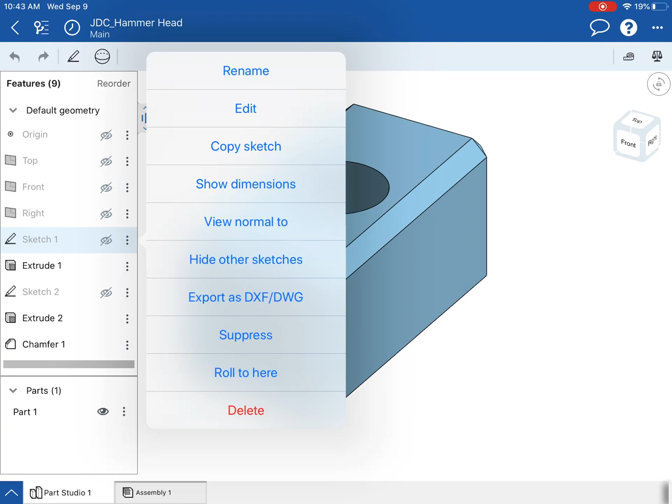And very quickly, this is going to be an easy fix, I'm just going to make it a little bit bigger. So the first thing I want to look at is probably sketch 1. Under sketch 1, you can see on the left-hand side there's going to be 3 dots next to where it says sketch 1. I'm going to tap those 3 dots, and then it's going to give me the option to edit. So I'm going to go to edit.

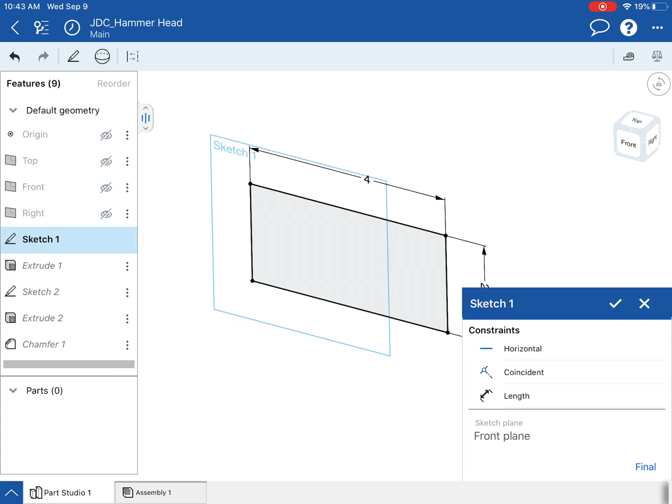And there I can see that I have a 2x2 square. That's what we started with at the beginning of our design. So what I'm going to do is tap on where it says 2. I'm going to double tap, and change that to 4. Hit the check mark. And I'm going to do the exact same thing with the other dimension - tap on where it says 2, double tap, change that to 4, check mark. Once I've made that change, I'm going to hit the check mark where it says sketch 1 in blue.

And now you can see that it's kind of changed, and it looks a little off, right? Or a lot off. That's okay. What we're going to do is go into our extrusion 1, and we're going to extrude a bit more than we did before.

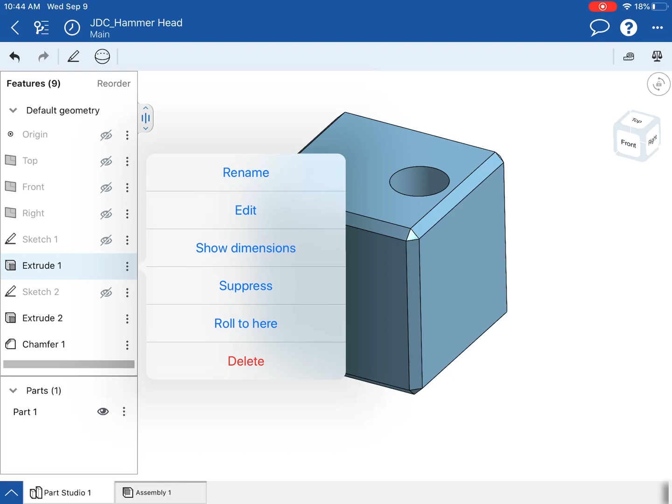So where you can see extrude 1 on the left-hand side, we're going to tap the 3 dots, and then go to edit. We just edited sketch 1, and now we're going to edit the extrusion to sketch 1. So edit, and you can see that under depth for that extrusion, we did 4. So we doubled up - we went from 2x2 to 4x4. So I think it makes sense for us to extrude twice as much.

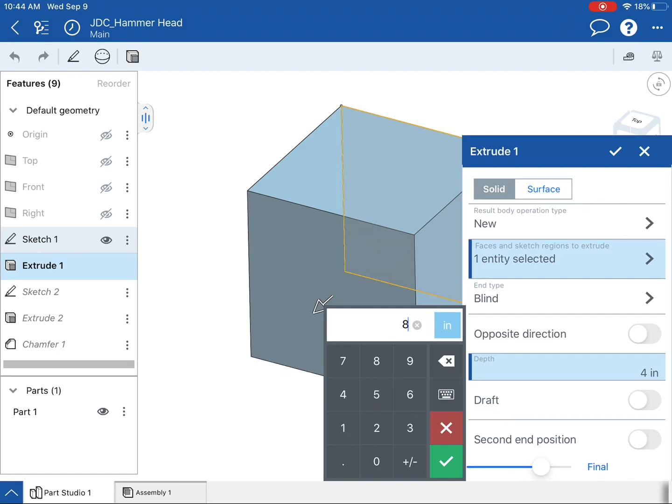So we're going to change 4 to 8. Where it says depth 4 inches, we're changing that to 8, and I'm going to hit the check mark. And now I'm going to hit the check mark for extrude 1 to finish that extrusion. And you can see now it is bigger, but now we have one more issue, right? The hole - not only is it too small, but it's in the wrong spot. We want it to be right in the center of our hammerhead, so we have to do that.

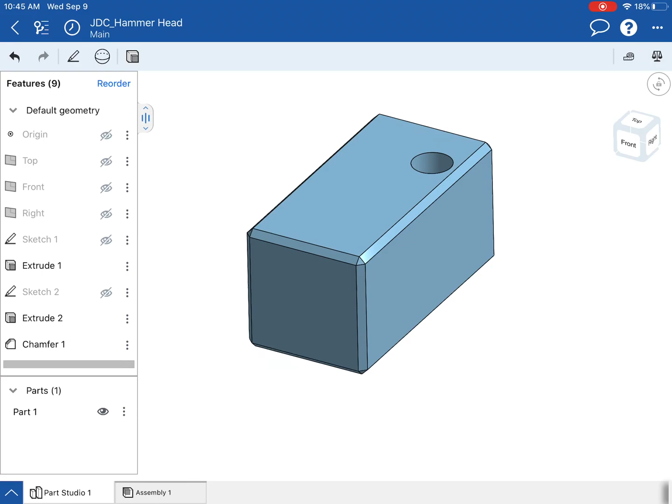That hole is located under sketch 2. So we can hit the 3 dots next to sketch 2 so that we can edit it. I'm going to hit the 3 dots, go to edit. And you can see if I zoom in, we have some dimensions based off the center point of that circle to the edge of our block.

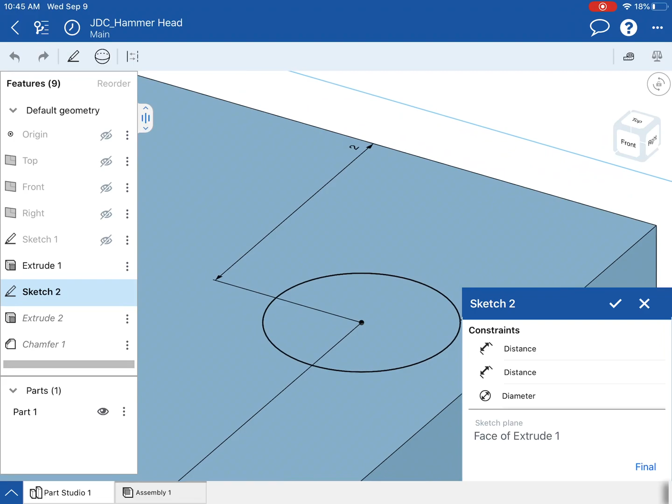Those are the dimensions that I want to change first. So you can see where it says 2 over there, 1 over here - those are dimensioning, that's a dimension from the edge of our block to the center point of our circle. So where it says 1, I'm going to just double tap that, and change that to 2.

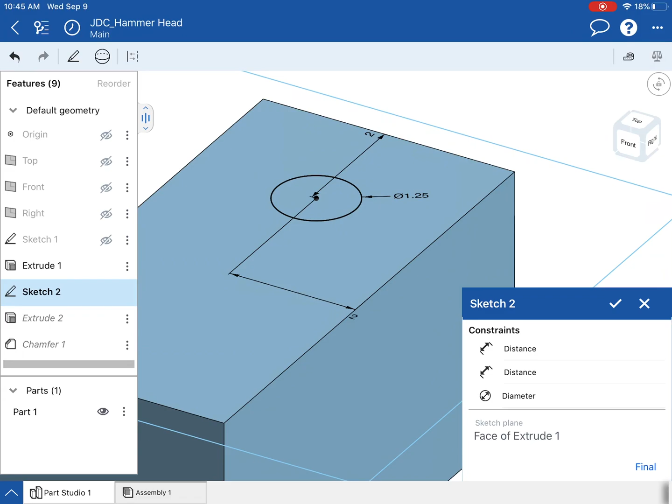Remember, we doubled our dimensions, so these dimensions as well should be doubled. So this one for 2, I'm going to change that to 4. All right, and then I haven't really decided how big of...

Diameter our handle will be, but I guess this is a good time to decide that. That circle you can see is 1.25 in diameter. I'm wondering what would happen if we changed it to 2, made it almost twice as big. I think that's okay, I think that's going to work. So we changed the diameter to 2, from 1.25 to 2.

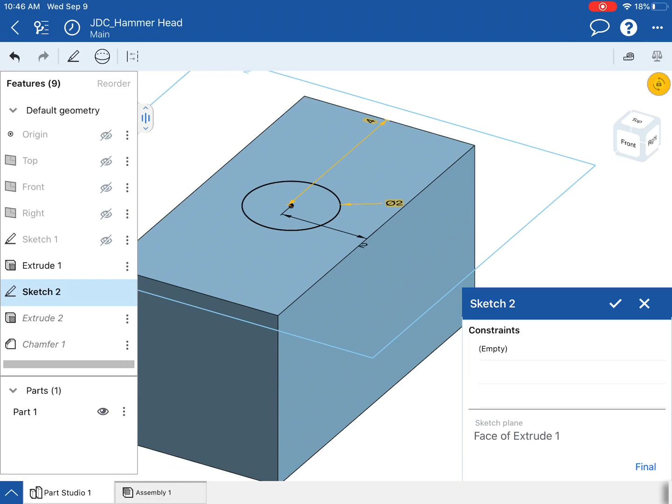And once I'm done with that, I'm going to finish my sketch by pressing the check mark here. And it looks like we are done with the hammerhead. Okay, I'm going to go on to the next part. This video might be a little bit long, but that's okay.

So hammerhead is now changed. So we have to go and change the diameter of the handle and lengthen it a little bit, make it a little taller. So I'm going to go into my handle, and two things we got to change, right? The diameter first. So the diameter is going to be changed in sketch 1 because we started out with a circle at the very beginning of our part.

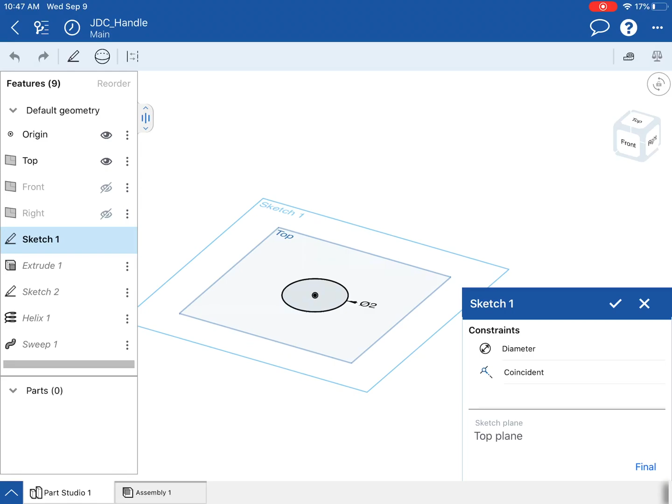So sketch 1, I'm going to go into the 3 dots and I'm going to edit that so that I can change that diameter to... looks like it's already at 2. That's interesting. I think I may have made that change, that edit already in a previous video.

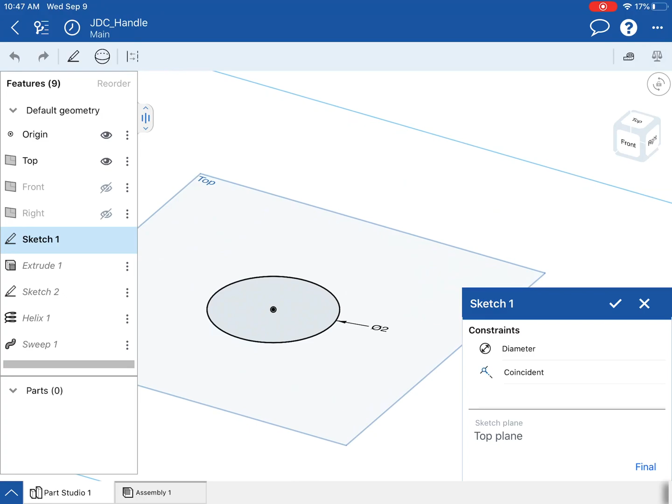So let's see, what if I just go back and pretend that I didn't make that change? So I'm going to go into sketch 1. What you're going to probably see is 1.25. Okay, so pretend you didn't see that. I'm going to go back, and that probably means I had my extrusion made already as well. That might have been a different number, can't quite remember. So imagine now that I'm opening it up again.

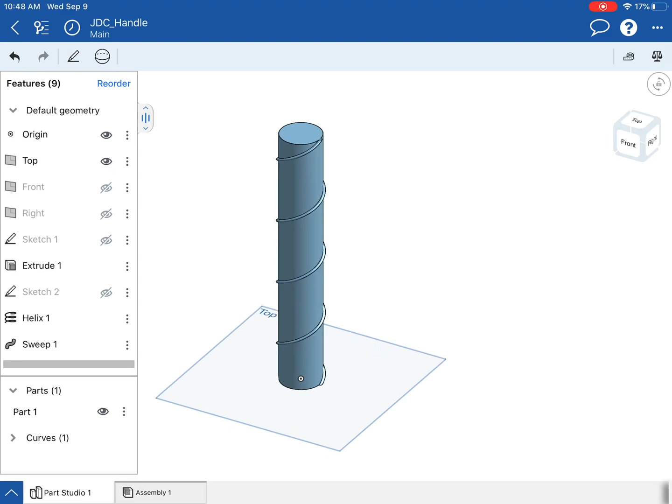So we're going to go into sketch 1, 3 dots, edit, and what you should see is 1.25, right? So we're going to double tap that and we're going to change that to 2. And I'm going to tap the check mark, and I'm going to finish my sketch by tapping on this check mark where it says sketch 1.

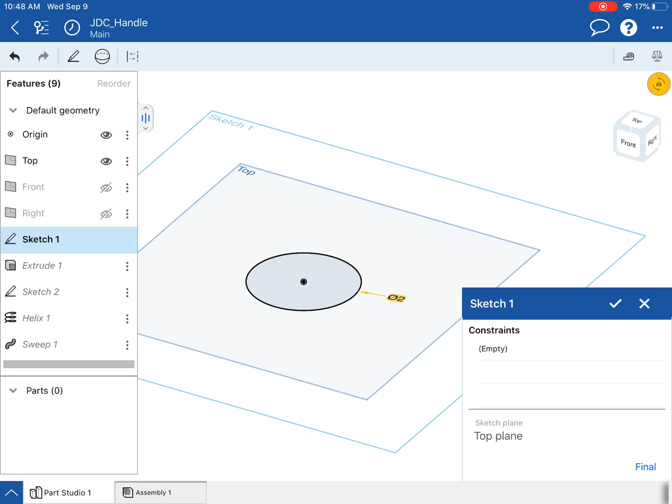And that diameter is now increased, but we do probably want to make that a bit taller. So under extrude 1, I'm going to tap the 3 dots again. I'm going to edit that, and it is at a depth of 8 right now. We probably want that to be a little bit taller, so I'm going to change it to maybe 15.

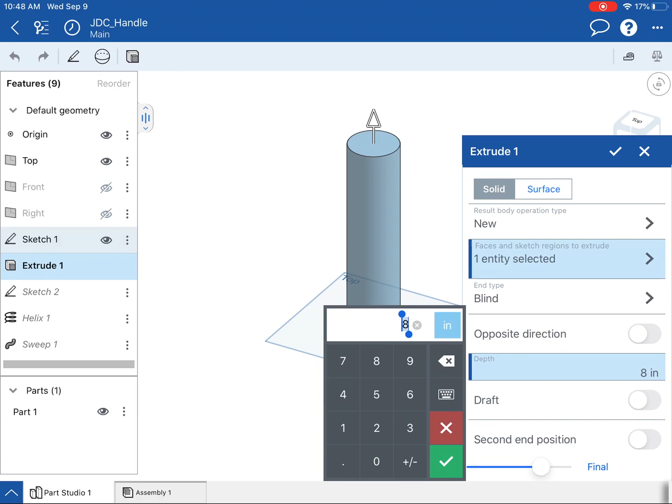We'll see how that looks. I'm going to finish my extrusion with the blue check mark, where it says extrude 1 check mark. And I think that is it. Okay, so now the handle is done.

We're going to go back, and we have our hammerhead edit done, our handle edit done. Now we just have to do the pommel. So if you remember, the diameter we changed to 2. That hole on the pommel is probably still 1.25.

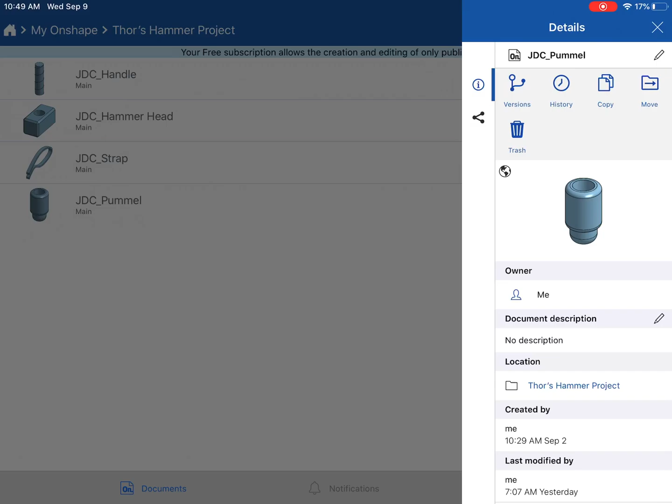So I'm going to go into that pommel, spelled that wrong. And you know what, I'm actually going to do that now. If you guys want to as well, I wonder if I can change the name of this thing. I realized I spelled that wrong. There we go.

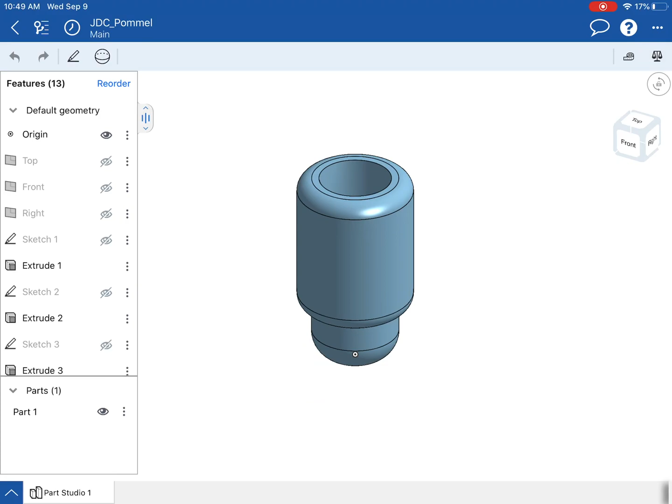And now I can go into it, go into that pommel. And what we're going to do is we're going to have to change the size of that hole. Now this might be the trickiest one, so let's see if we can figure this out. I'm going to go into sketch 1 first, and I'm going to edit that. So that is the outer diameter of our pommel.

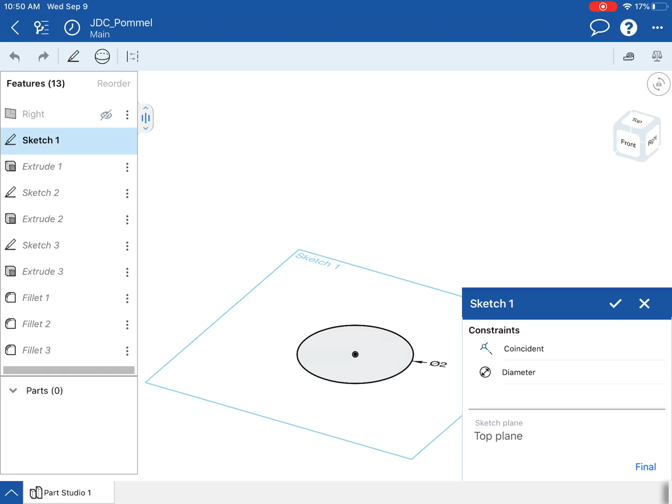That is going to need to be increased because the hole for the handle is 2. So if we can increase that by, let's say, at least 0.75, I would think. So let's do 2.75 and see what happens. I'm going to hit the green check mark and then the blue check mark.

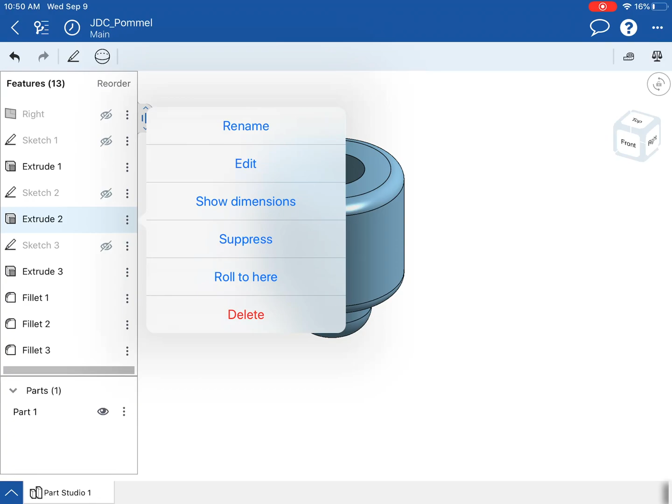Okay, that makes it look a little funny, but once we change the inner diameter, the hole, it might look a little bit better. So that one is going to be under extrude 2. I'm going to go to extrude 2, 3 dots, edit, and yep, that is the size, or sorry, that's the depth. Maybe we don't want to do that.

So I'm going to hit the check mark under extrude 2. It's actually the sketch we want to go into. It's going to be sketch 2 for me. So sketch 2, 3 dots, edit, and yeah, that's what we want to go into. So sketch 2 has that hole, that circle that we created of 1.25.

We do have to change that to 2. So I'm going to type in 2, green check mark, finish my sketch. There we go, that looks a little bit better. But now look, we got an issue.

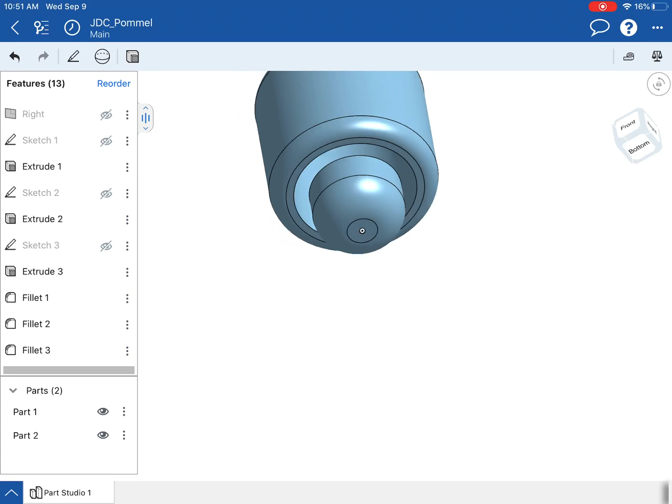And this issue is because of the fillet that we have set on our part. So that fillet, I believe, is fillet 2 for us. All I have to do is decrease the radius on that. So under fillet 2, I'm going to go to edit. And instead of 0.25, I'm going to decrease that to maybe 0.2 and see if that helps us.

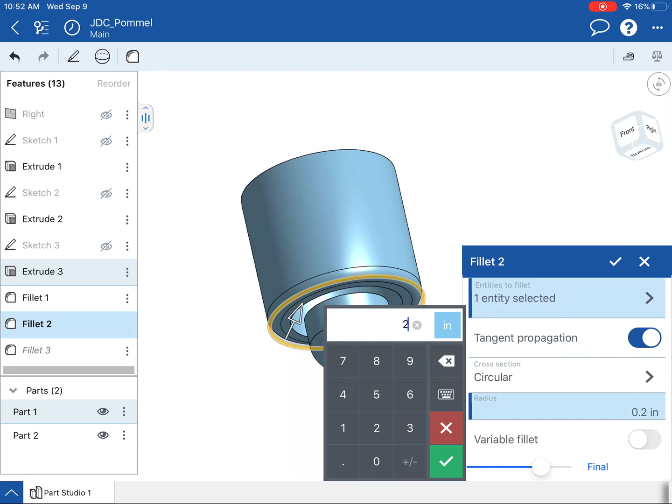Nope. I'm going to change that back to 0.25. That is the wrong fillet. Sorry, I'm just working on this as I go. I haven't really looked at this since last time I made it. So I'm trying to remember where all of our fillets are.

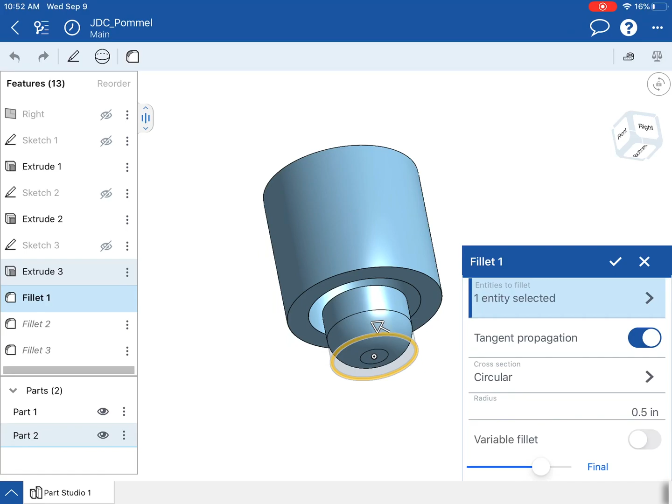So maybe that is fillet 1. I'm going to go into fillet 1 and edit. Nope, that seems to be the bottom one. So I'm going to get out of that. What about...

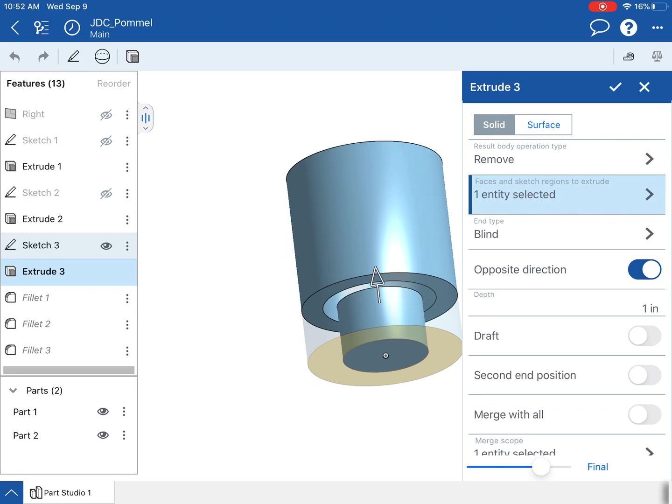Extrusion? So is it not even the fillet that's the issue? Might be the extrusion. If I go to extrude 3... trying to figure out, trying to troubleshoot. It could be the extrusion on the entire hole. When I made the hole, I might be extruding down too much.

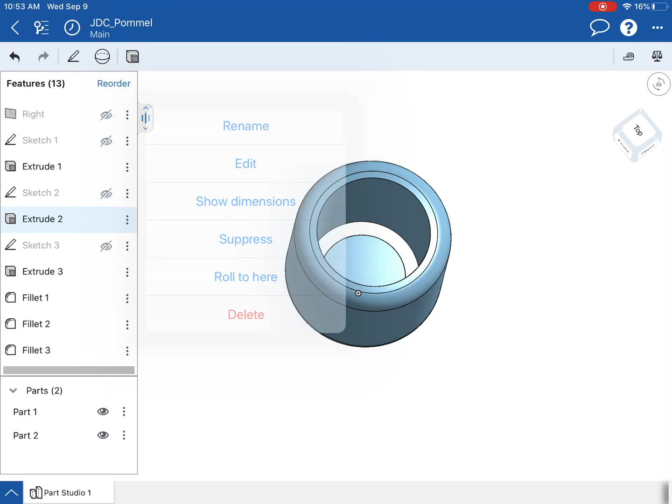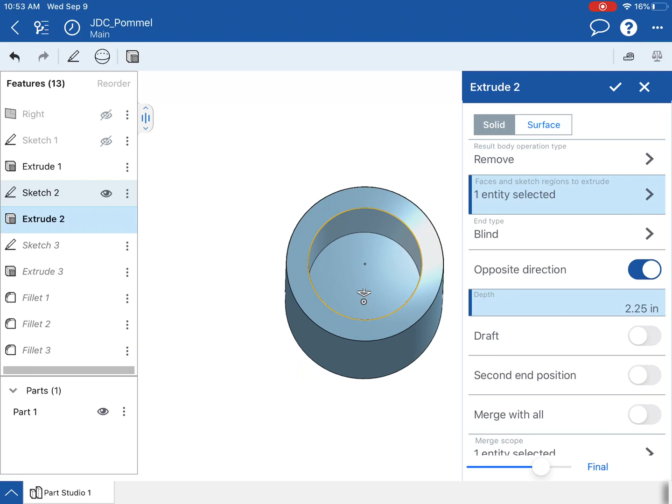That's my guess. So what I'm going to do is go into my extrude 2, which has my hole, and go to edit. Maybe that depth of 2.5 is too deep, that it's cutting into my part. That's my guess. So instead of 2.5 for my depth, maybe I can just change it to 2.25. Check mark. Check mark. And yeah, that seems to fix my issue there.

Now you can see that the bottom part of this pommel is a little bit too small. That little end of it, it just isn't proportional anymore. So that's probably the last thing that we want to fix.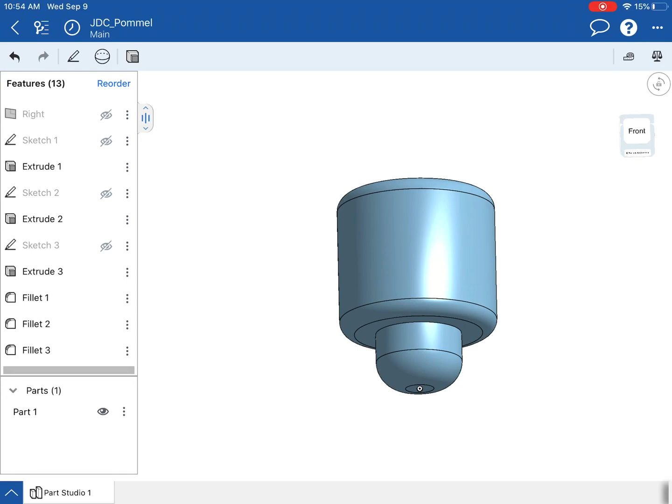And if you remember, that should be under extrusion 3, which is tied to our sketch 3. So we might need to look at sketch 3, edit. And yeah, that's our circle there that we created.

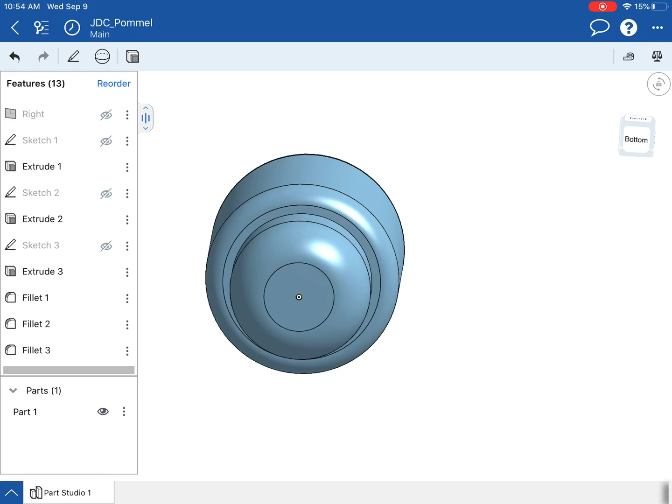We might need to increase that a bit. So if we increase that maybe to 2, let's see what that looks like. That might help us. So I'm going to change that to 2, hit the check mark, and yes. I'm going to show that one more time.

I'm going to undo that. So you can see it's not proportional there. It's a bit too small. That circle needs to be increased. The diameter of that circle at the bottom needs to be increased.

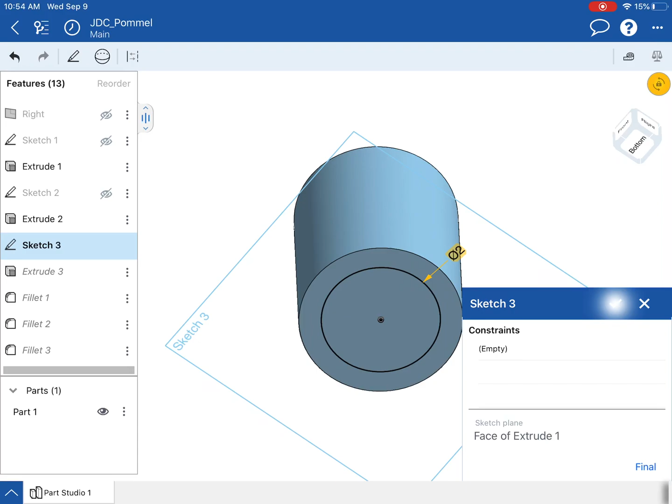The way I do that is I go into my sketch 3, 3 dots, edit, and instead of 1.5, I'm going to increase that to 2. Green check mark, blue check mark, and there we go. Now it's going to be able not only to look proportional, but the handle will be able to fit into that hole, because that diameter is now changed to 2.

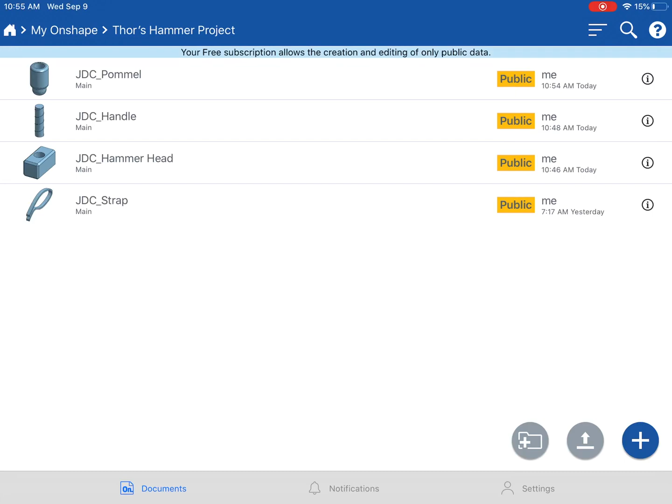All right, now I think we are done with all of our parts. I'm going to go back, and we should be ready to assemble all this together now. We'll see you in the next one.